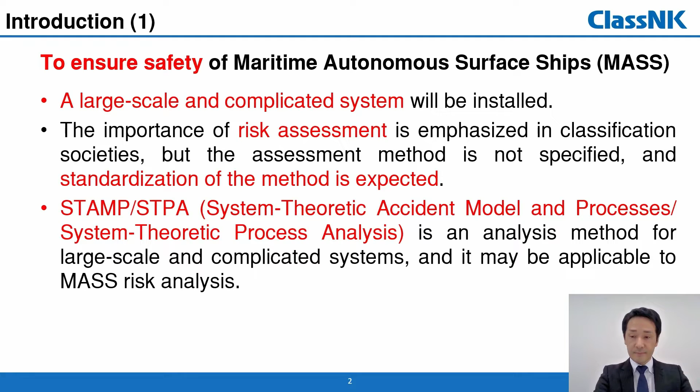Second is to certify the autonomous operation system of MASS. The necessity of a new goal-based MASS instrument is being discussed at IMO. At the moment, there are many concepts of operation for autonomous operation systems. So it is difficult to set uniform requirements. In the safety evaluation in goal-based, it is important to extract the functional requirements and share them with the certification side.

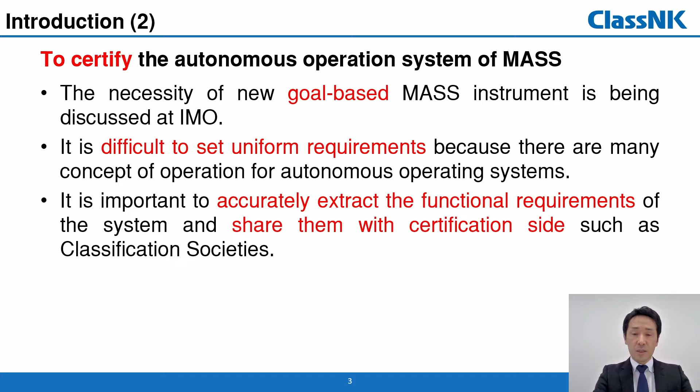So, in this study, we performed two discussions from certification point of view: the effectiveness of STAMP/STPA in the initial stage of MASS design and how STAMP/STPA works in goal-based safety evaluation using ClassNK's guidelines. In the actual examination by ClassNK, a document examination, including a review of risk assessment results, is performed to confirm the validity of the design. And function verification tests are also required to confirm the developed system meets the functional requirements specifications.

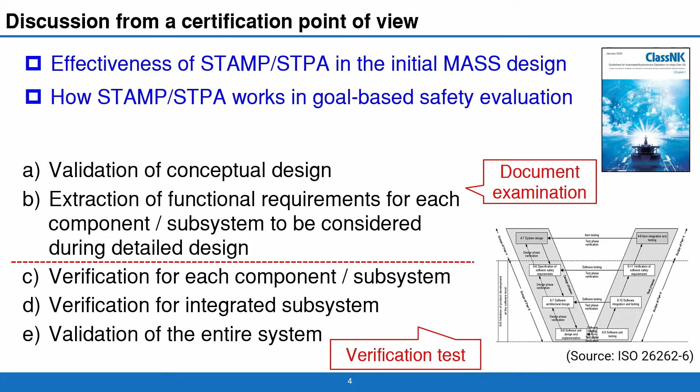As for the functional verification test, the test items are to be decided according to the characteristics of the autonomous operation system. In order to proceed this process effectively, the NK guideline recommended the V&V processes. This time, assuming the examination for approval in principle, AIP, we discussed how the STAMP/STPA method worked in process A and B, validation of conceptual design, and extraction of functional requirements.

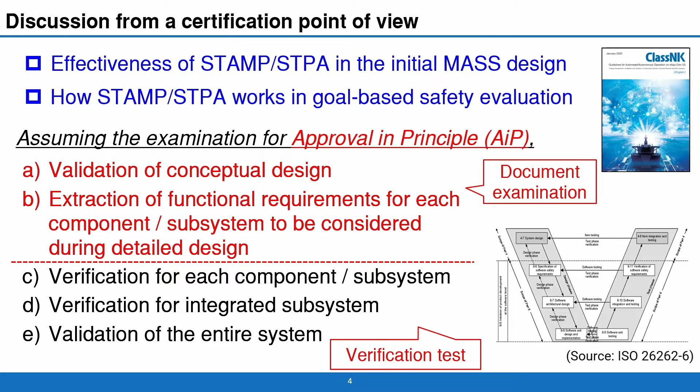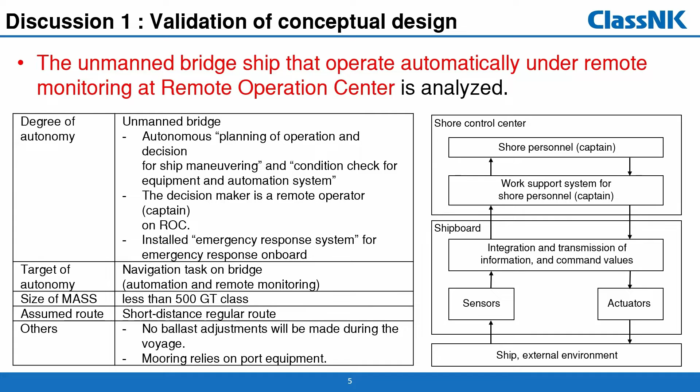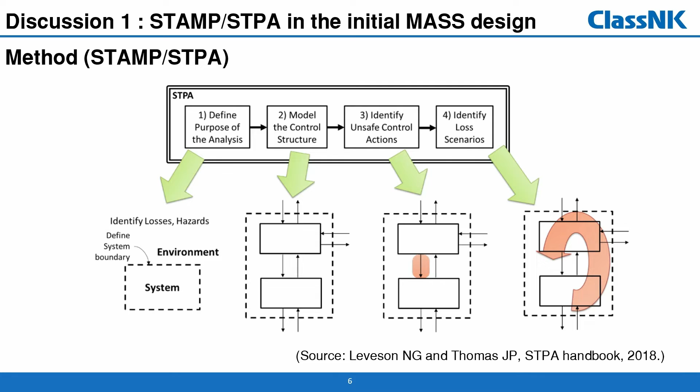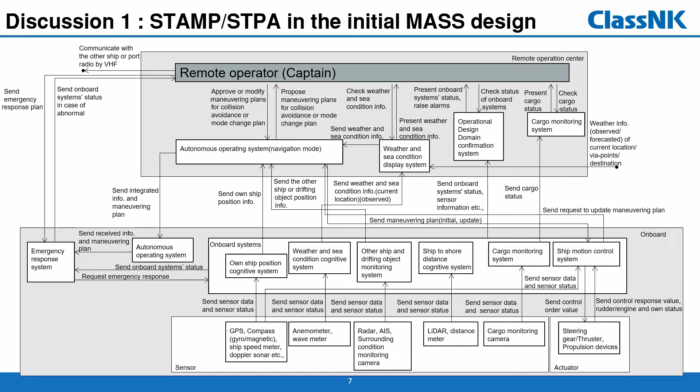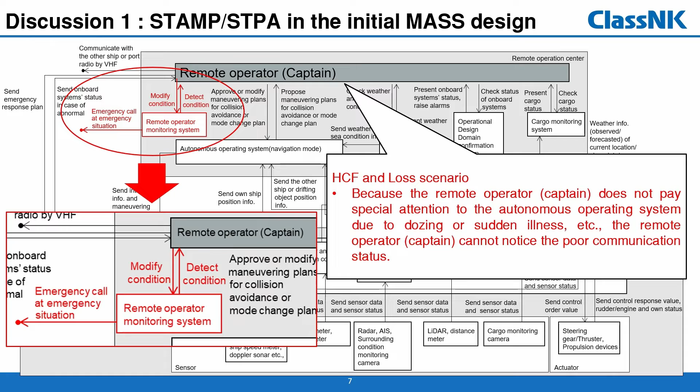I would like to introduce one sample. This is a hazard causal factor and loss scenarios related to remote operators losing consciousness or sudden illness. And as a countermeasure, addition of a remote operator monitoring system is proposed. In this way, by describing loss scenarios and examining countermeasures, the CS diagram could be improved. It can be said that the validity of the conceptual design could be verified by STAMP/STPA. Also, this improved CS diagram can contribute for the certification side to understand the characteristics of the autonomous operation system.